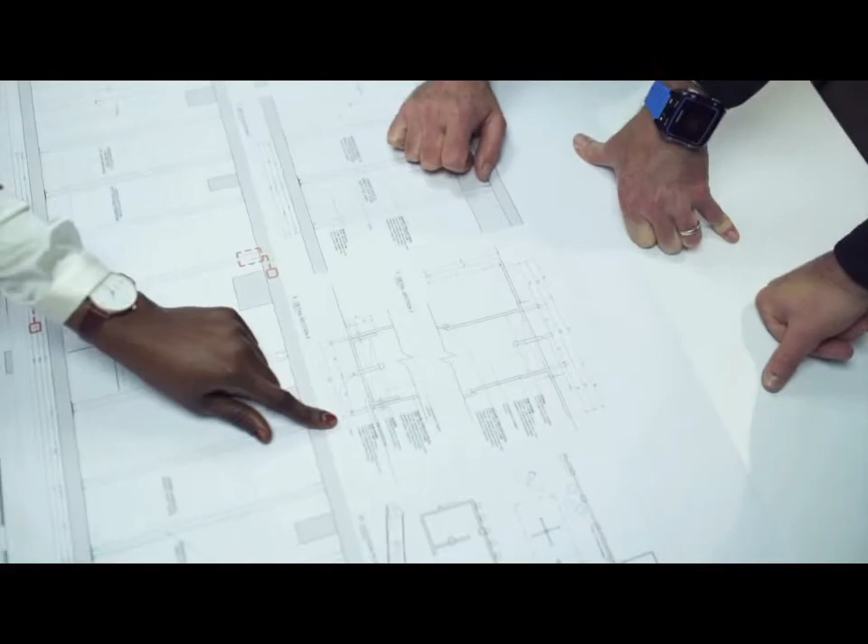We are bringing an exciting product to the sunny shores of Cape Town, South Africa. JANSEN Steel Building Systems, ranked #1 in the world and manufactured in Switzerland, will now be available on your strip. We'd like to welcome you to our world-class showroom in Woodstock for a coffee and a chat. You're welcome to bring your drawings of windows, doors, skylights, facades, or architectural elements, and we'll work with you to create a sustainable and yet elegant solution. The systems cover all elements like glazed fire, security and bullet-resistant doors, slim steel profiles for top-hung windows, and gorgeous heritage fenestration that is thermally efficient. Swiss ironmongery to last you a lifetime, and there's a wide range of products including tilt and turn windows and facades for you to come and see. In addition, we provide CAD and BIM objects, and we'll be training, accrediting and supporting local metalworkers in design, estimating and fabrication. Our local French-speaking investors, Olivia and Jeff, took good advice from experienced friends who are distributors or metalworkers for JANSEN in Europe, and they invested in M2G to become the international exclusive distribution partner for JANSEN in Africa. See you there.

That was a quick introduction to the business M2G, situated here in Cape Town, that we will be rolling out nationally, and already we have metalworkers who have joined us from Joburg and are nearly complete with the accreditation program. So let's have a look at what this program means.

First of all, we get an idea of what you do and what your interests are, and get an idea of what training you require. We then agree what those training goals will be, looking at what we want to get out of the training to make sure it remains focused. And then we deliver the training.

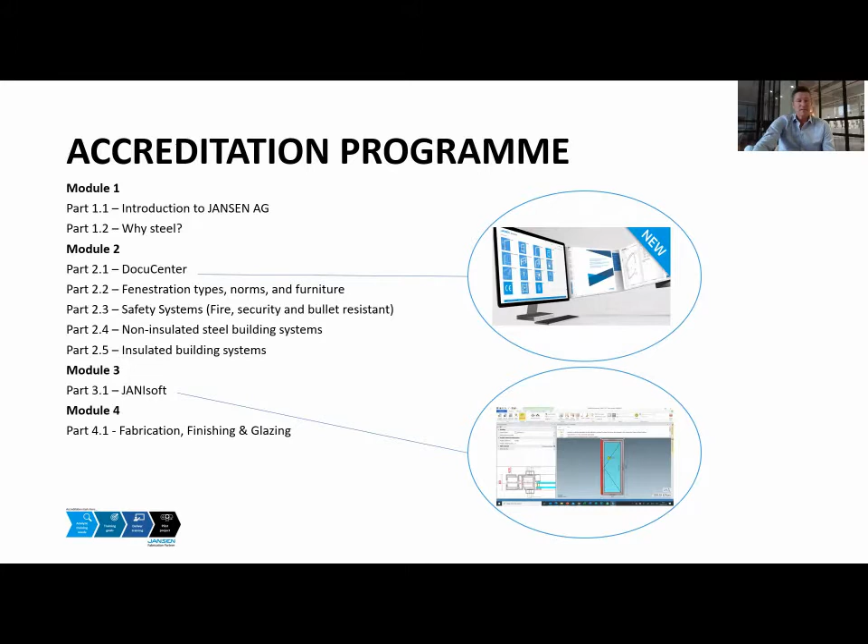And the last part is the surface protection and logistics, just looking at how do you protect steel. I think from those who are familiar with the corrosivity maps in South Africa, apparently corrosion worldwide is worth $2.5 trillion annually.

So how do you protect it in the coastal regions? The ISO standards have created a standard for the various coastal regions to the drier inland regions, and they're just taking the right view on protection to ensure that the JANSEN brand is upheld.

Okay, and then module 5 is the last part of the program, and that is the trial project for accreditation. And that might be you'll make a door for us or a window that we can ensure that what you are delivering to the client is good quality.

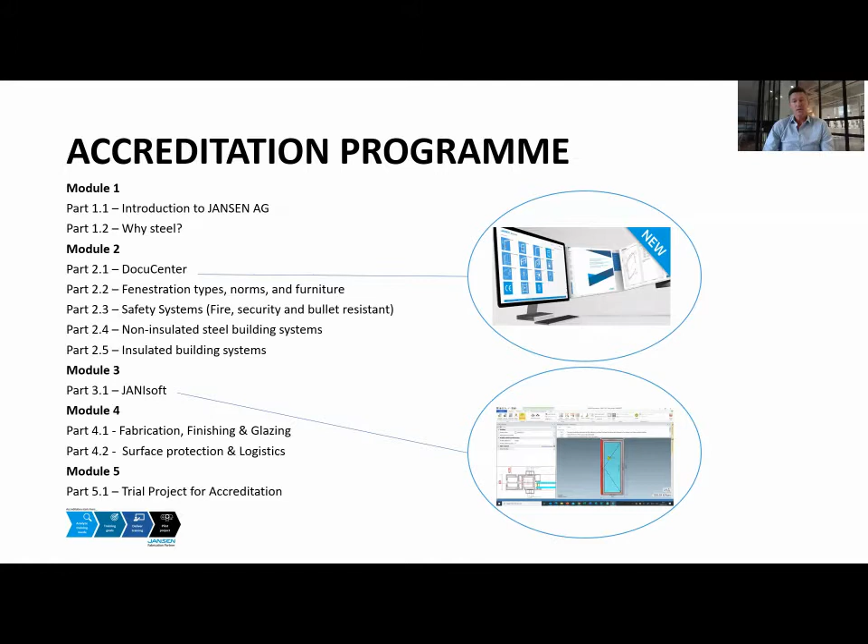So as metalworkers, the reason we have this accreditation program so that you can buy our profiles is to ensure that you become good ambassadors for JANSEN. And our values are quite simple: professionalism, excellence and trust. And that's how we intend to win a niche market upon which you can build your business locally.

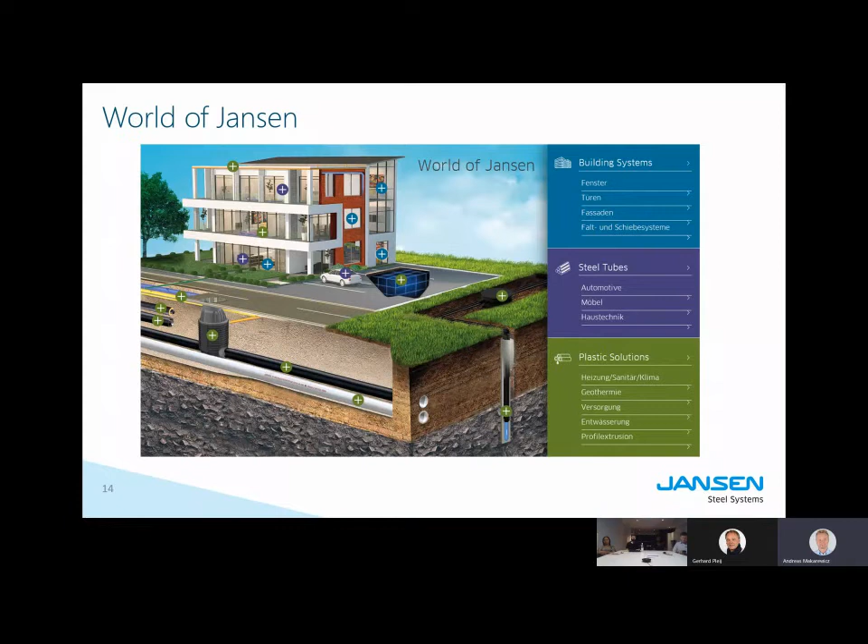A few detailed examples. Steel tubes, as I said, car elements, mainly responsible for the stability and safety of the car, and also transmission of power. So you already can notice, these are really high quality elements, high quality steel tubes. This is what we make. This is also what allows us to exist here in Switzerland.

These days, 95% of all steel tubes are manufactured in Asia, China and India. And to be able to produce steel pipes in Switzerland, we have to offer a little more than just average quality. We offer the state-of-the-art, high-tech pipes.

Furniture, all the tubes you see here covered with chrome or chromated steel tubes, this is what we deliver. We don't deliver them already finished. We deliver the raw material, and the furniture companies finish them and assemble the furniture.

Tables like these with adjustable height, the columns for the tables, this is also Jansen, all this furniture based on tubes. This is it. Here you see a chair, office chair, this is it. Also sanitary business, we're big here.

Piping systems and radiator elements, this is steel tubes. Here a little more detailed view of a car. You see here the steering elements, drive shafts, prop shafts, airbag tubes, piston rods, amplifiers, and so on. This is all based on Jansen products.

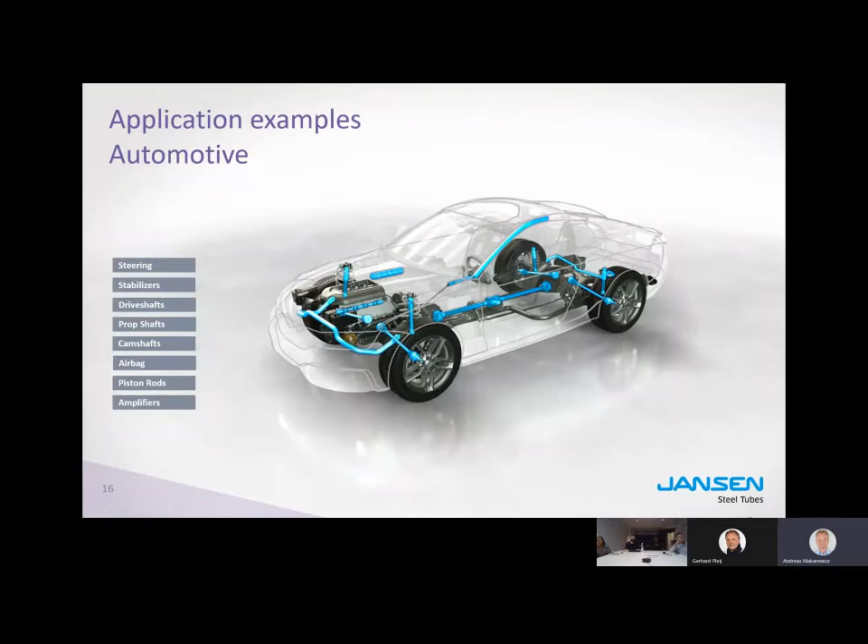Plastic Solutions, the smallest business division, was founded in 1955, when the modern plastics hit the market, PVC and later polyethylene, PE. We started experimenting with that in the 50s and then established a full product line, mainly pipes for water and gas supply, heating, air conditioning, and plumbing.

Geothermal systems is a subdivision of Plastic Solutions. Here, not only the tubes are produced, but also the sensors, the sondas, and everything you need for the geothermal heating system or energy recovery.

Do they have systems that compete with Geberit's typical plumbing systems? A good question. In fact, we produce some of the tubes that Geberit sells. So we have our own brands, but they are not very strong and not very recognizable in the market. We also produce or provide the tubes for other market leaders like Geberit.

The Mepla system, very popular in South Africa, is produced partially here in Oberriet. So the multi-layer systems, we have PE, aluminum, and another PE layer. I'll show you an example of that.

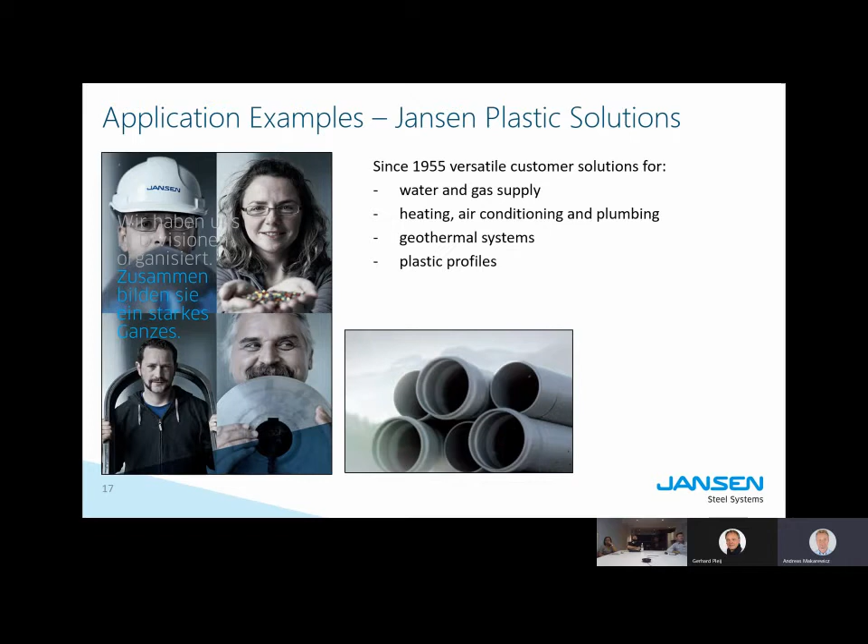Also, several plastic profiles are extruded here in Oberriet. We use these profiles in our building systems division as thresholds and as different elements for windows and doors. Here are a couple of examples.

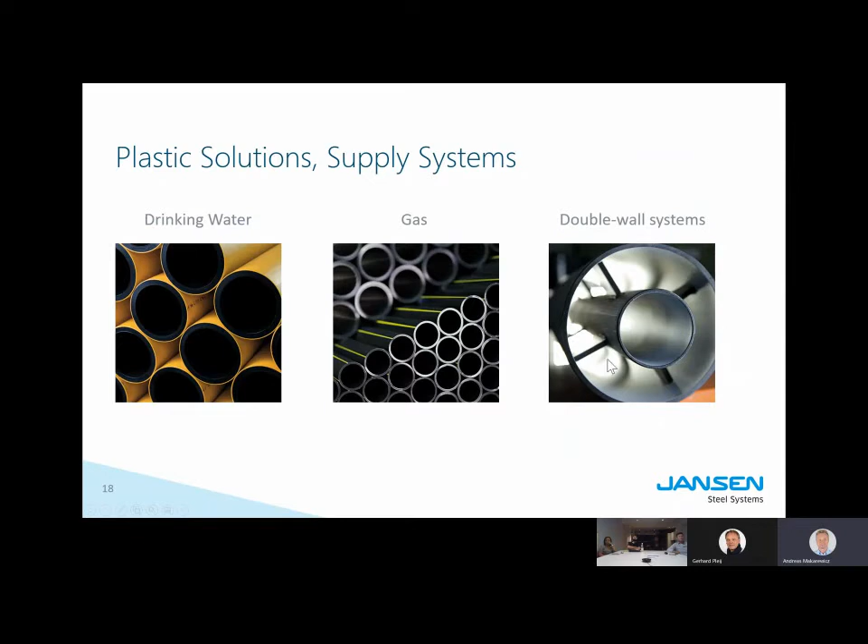Supply systems, drinking water, gas. Jansen is also strong in the insulated piping systems, the double wall systems. Here you see an example, thermal water in a tunnel. This is a typical application here.

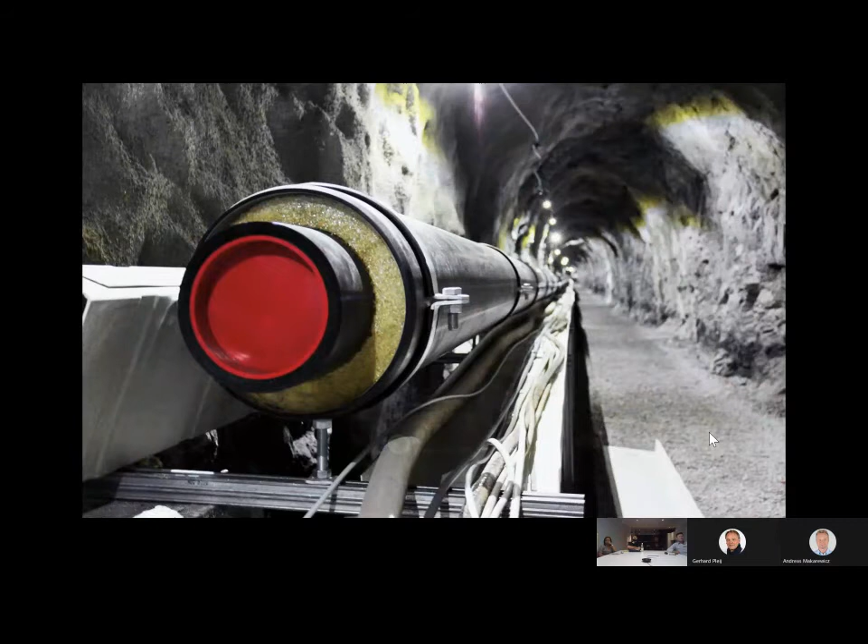Incredible. Drainage systems as well, sewer pipes, seep pipes. The Q-bic Plus is a rainwater management system. It's a modular system where you connect several of these cubes to a rainwater management system. We have won several awards when it comes to design and usability of these systems.

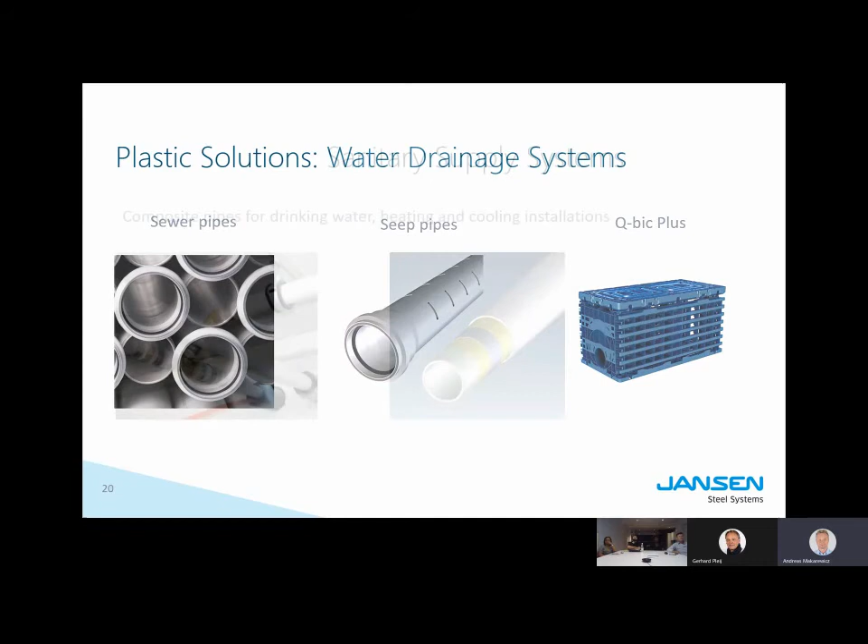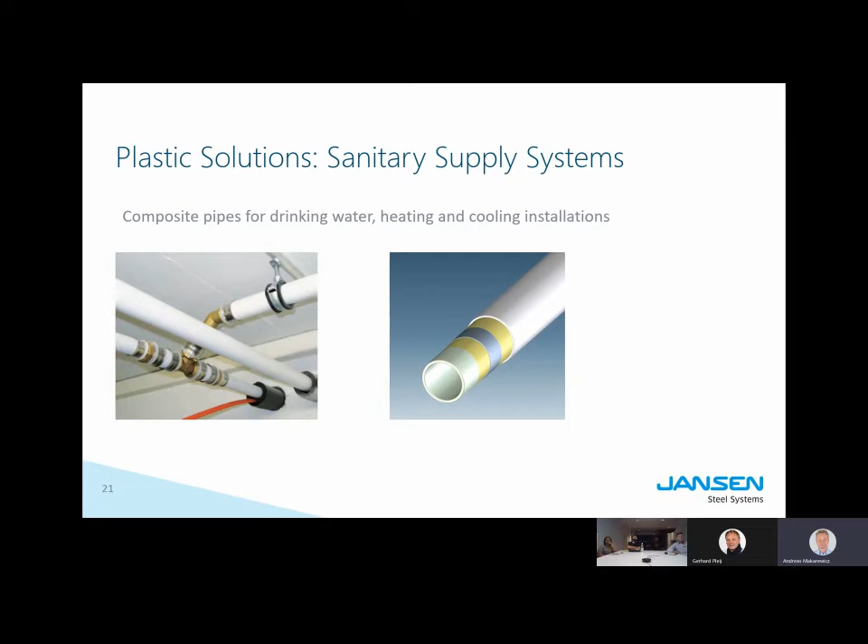Here you see the multi-layer system for either heating or water supply, drinking water supply. And this is, I guess, Viega. Viega is the final supplier of these systems, and we produce the raw material, the pipes. They equip the systems with fittings and then sell the full solution. Geberit does exactly the same.

Geothermal systems, as you see, the pipes and also the elements, the sensors, everything you need. One of the fastest growing subdivisions here at JANSEN. Huge potential.

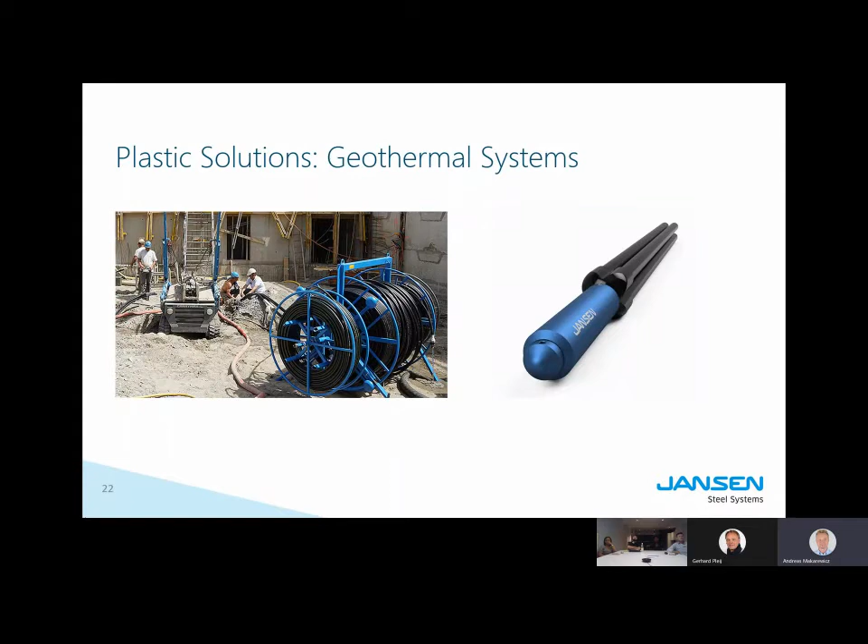But what concerns us, what we will concentrate on, is the building systems. This is where we are active.

To begin with, I would like to show you one of the nicest buildings here on the JANSEN site. This is our campus building where the steel pipes are headquartered, where the division or our company heads also have their offices.

And this is also for the architects. It's a very prestigious building designed by Davide Macullo, a star architect from Switzerland, a student of Mario Botta, one of the world's best-known architects, I guess. Davide Macullo is, by the way, also a friend of the JANSEN family, and he delivers a lot of good inputs when it comes to how to approach architects, who are one of our main target groups as well.

What helps us develop the building systems is the new technology center, which you see here on the right-hand side. It has been established some 3 or 4 years ago. It has been built on a site where an old building was standing. It was demolished, and a new building was built. It's equipped with a nice VISS facade on 2 sides.

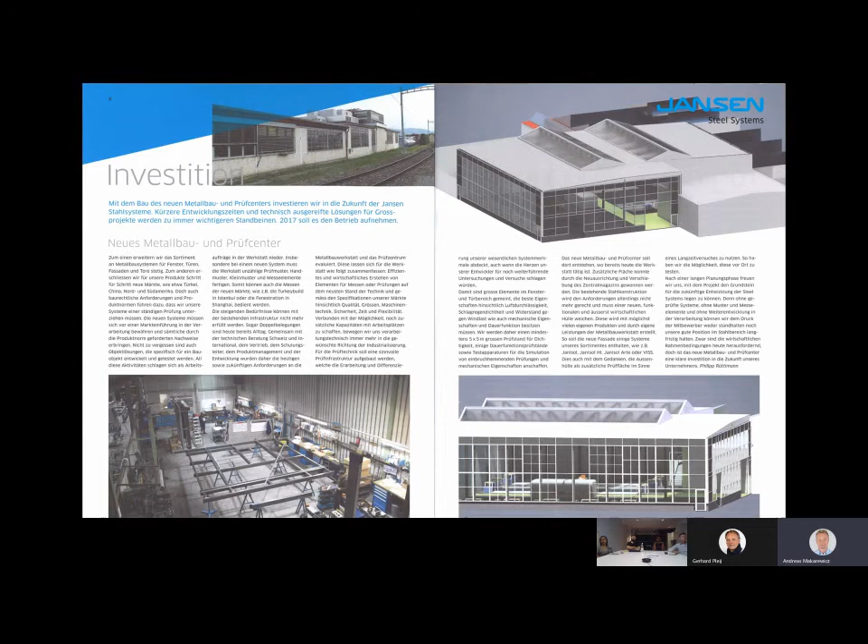That means we can also prepare the tests. We can do the preliminary tests, and once we're ready, we invite the officials and run the sharp tests here on site. Saves a lot of time and a lot of money in the end. And of course, the chance of succeeding, of passing a test, has become much greater since we have this building here on the site.

Different target groups, differentiated challenges. As Gary mentioned, we are active in high-end residential and in public project business. The big turnover comes from the projects, but high-end residential is where we get a better margin and can employ our imagination much better. Especially the developing countries offer us opportunities to cross borders and try out all the possibilities our systems offer.

A couple of examples here. This is a concert hall in Kilden, Norway. You see a fraction of the facade. I'll show more pictures of this project later. The particular characteristic of this facade was the height - it's some 21 meters high, as far as I remember, or 16. I have the exact data later.

It's one of the highest facades we've ever built, with the highest static requirements, due to the fact that this concert hall is located next to the sea in Norway, and the wind load is extreme - there was a requirement of 150 kilograms per square meter. Combined with the size of the facade, we had quite a challenge. We mastered it - the facade is 130 meters long and, as I said, 20 or 16 meters high. I'll give you the correct data later. So, one of the biggest facades, one of the most impressive ones.

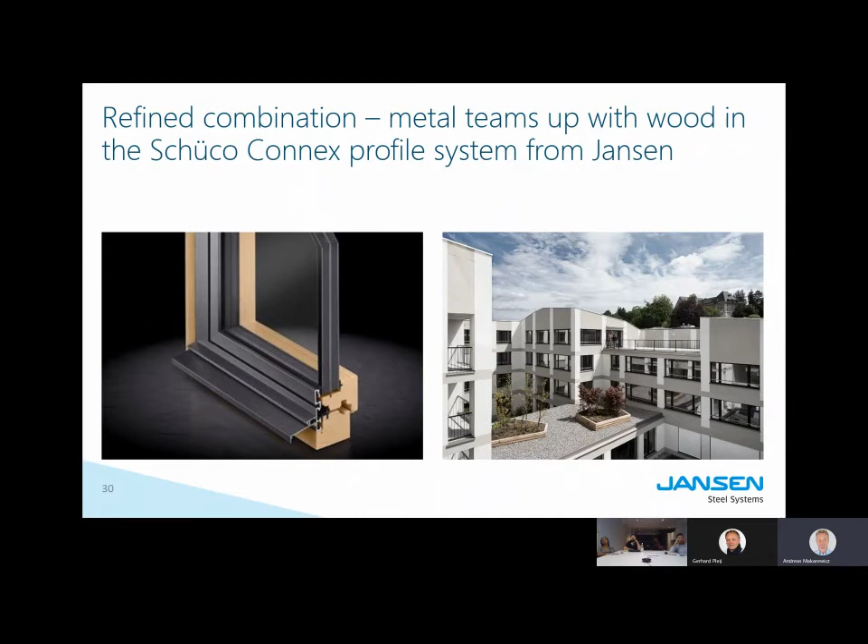We passionately keep creating something special, and this will not change in the future. Our technology center gives us the possibilities, and I'll show you a short movie here - an image movie of the building systems, just recently produced. There is audio in the background; it basically expresses the idea that there are no limitations with steel. Steel is, let's say, the raw material from which the architect's dreams come true or are made of. And here you see some examples of JANSEN projects.

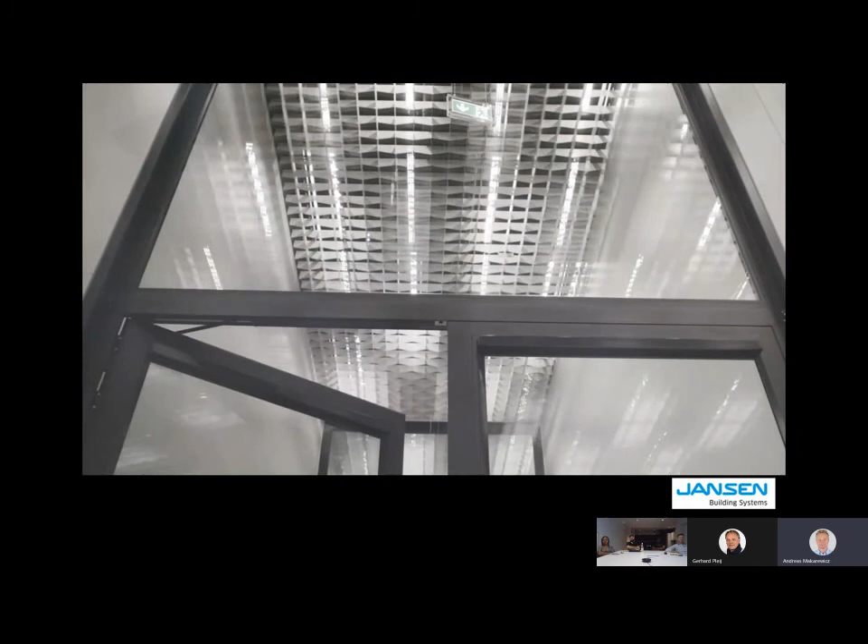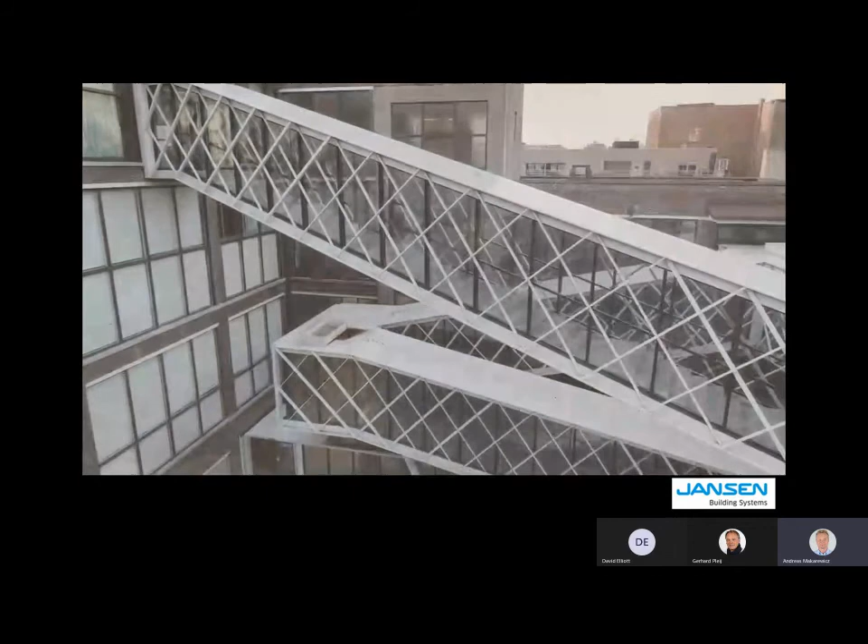History, elegance, and natural, durable, secure, slender, and sophisticated. This is why we offer solutions for windows, doors, and facades made of steel, corten, or stainless steel. For outside, for inside, for renovation, for new builds. And it looks like this, or this, or this. And while you take care of your customers, we'll take care of all the rest. Complex structural calculations, U-value calculation, technical testing, and fire protection. Construction of life-size samples and fabrication training for metal fabricators. One material gives you infinite possibilities.

Good, I'm glad it worked. The next movie is the one I want to show you with the sound. It's about our production facilities and the production methods we employ here. So far, so good. Do you guys have any questions concerning the material I've shown you so far? No, all the content looks good.

I was smiling listening to that voiceover of the video. Initially I thought it was Swiss German, then it sounded like a British guy, and I can't decide what nationality that voiceover was. It's mainly GB, it'll be British English because that's the speakers we have available here. So that's where it comes from. Yeah, we once had somebody from Georgia, but it didn't work. Hi, how y'all doing?

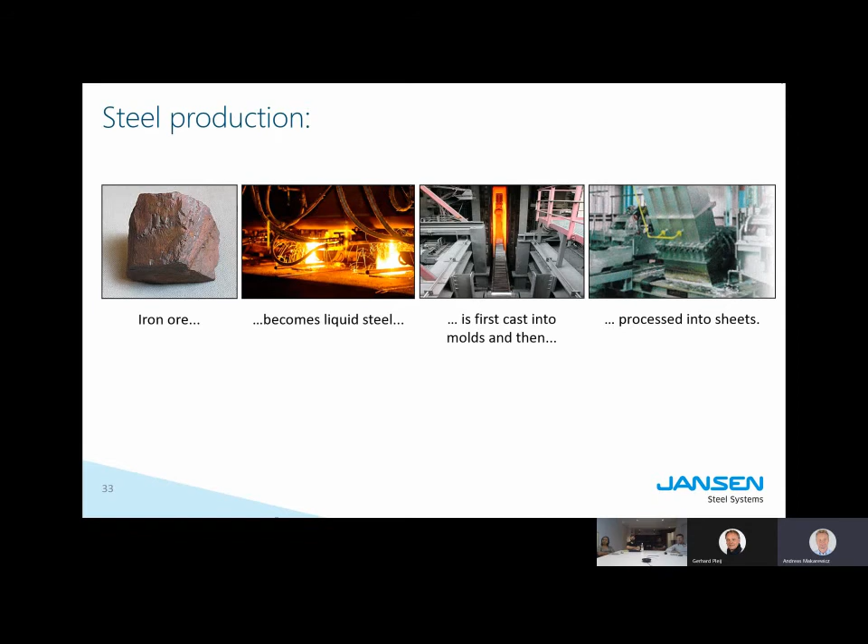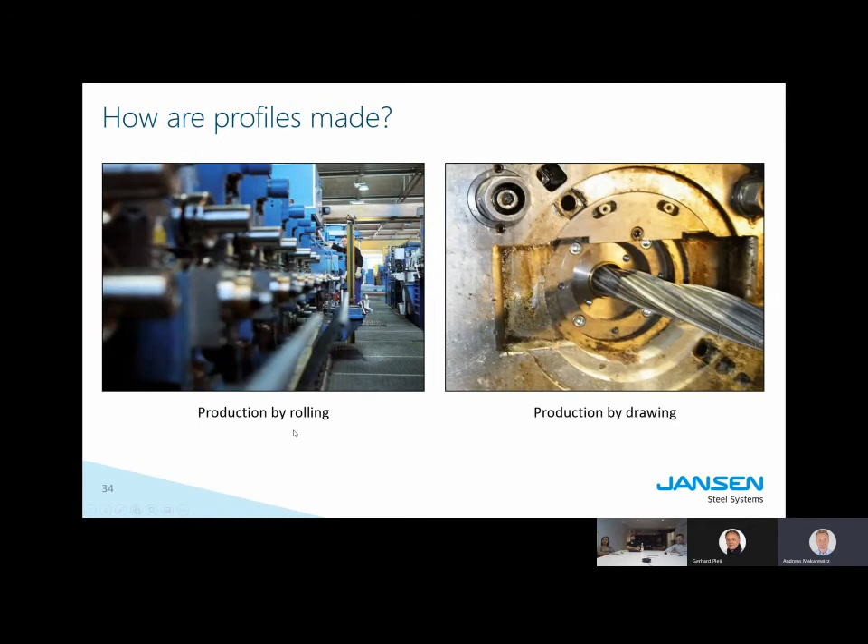I'll run it and we'll talk about it later, since this replaces the factory tour. Since you guys are far away from me, I can take you to the production site this way. Rolling and drawing are the two methods we use. Rolling is transforming a flat piece of steel, or a continuous flat piece of steel, into a tube, a round pipe, welding it, and then either transforming it into other shapes or cutting it into pieces.

So this is rolling, cold rolling, and drawing is done by pulling an already welded tube, produced in the rolling process, through a matrix or die - an inner die and outer die - and the gap between the two dies defines the shape of the structure you want to achieve. With the drawing method you can produce irregular shapes, twisted pipes, twisted shapes, different wall strengths of pipe or profile walls, and complex profiles altogether.

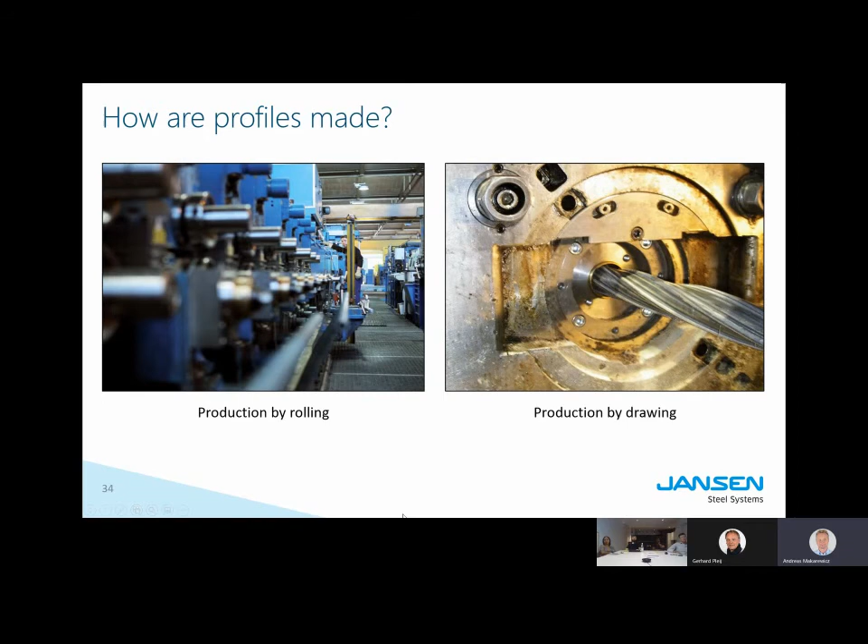So let's watch the movie, which will explain how these two methods are employed here at JANSEN.

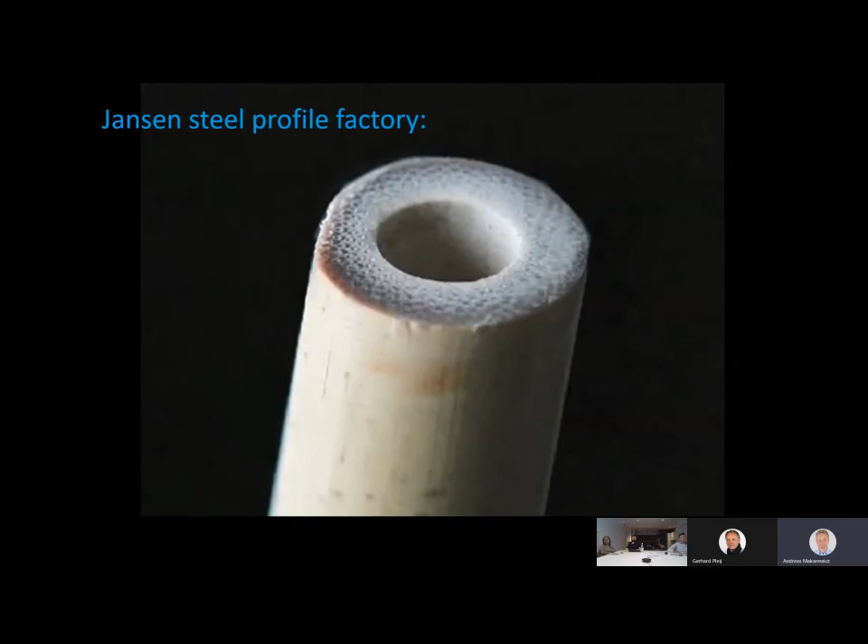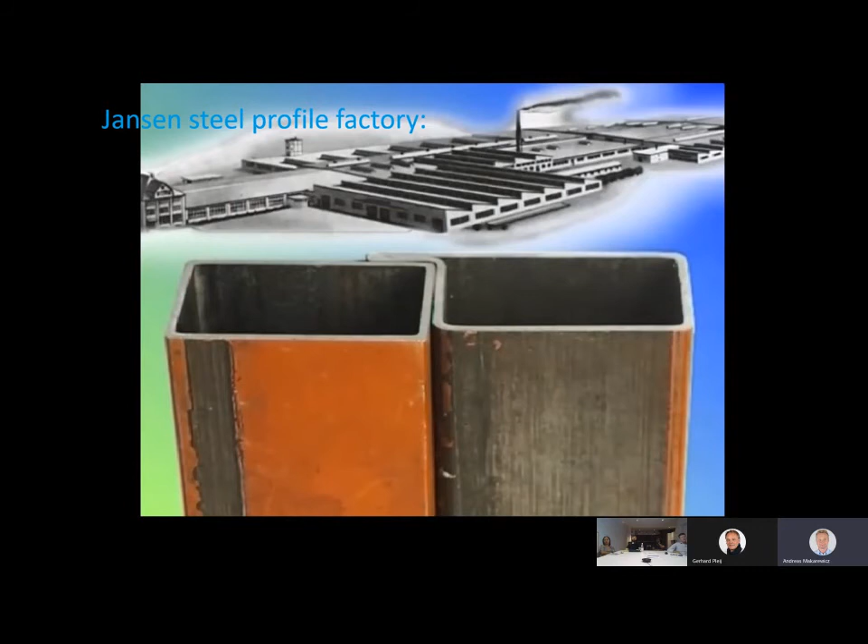There was no need for man to invent the tube. Nature had been using it to great advantage long before, in her aesthetically and functionally balanced art of construction. Back in 1930, JANSEN produced for the first time cold-drawn, profiled steel tubes of asymmetric cross-section, known as flanged profile sections, for door and window construction. Induction and high-frequency welding were introduced into steel tube manufacture from 1954 onwards.

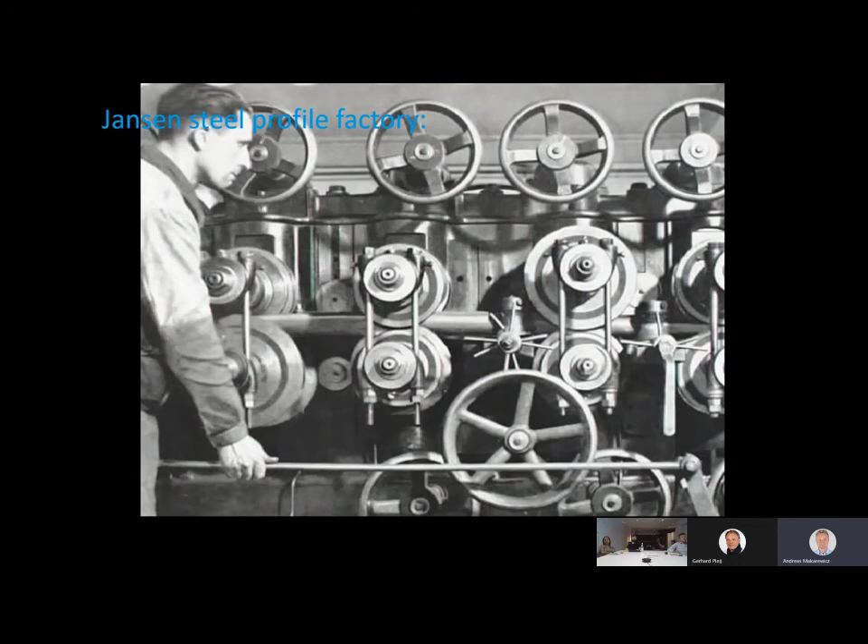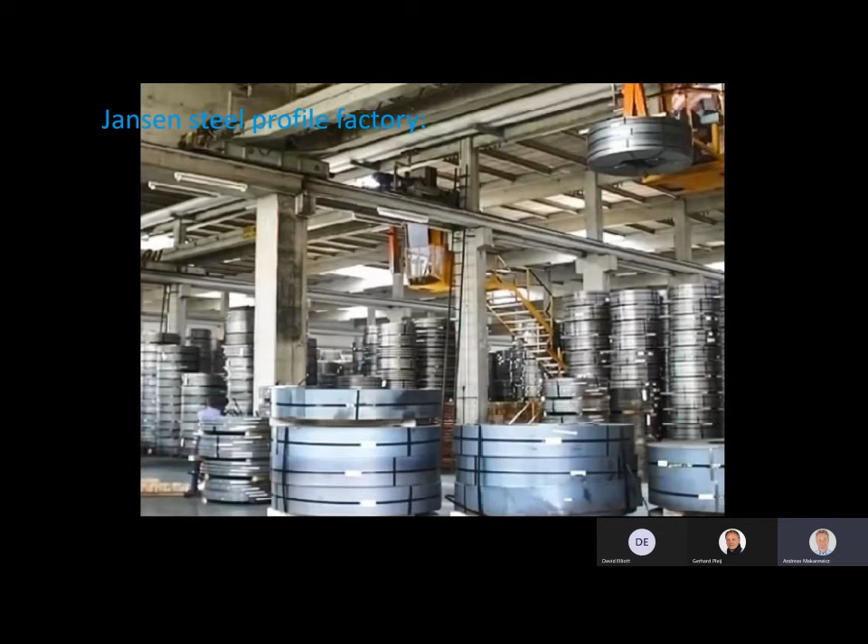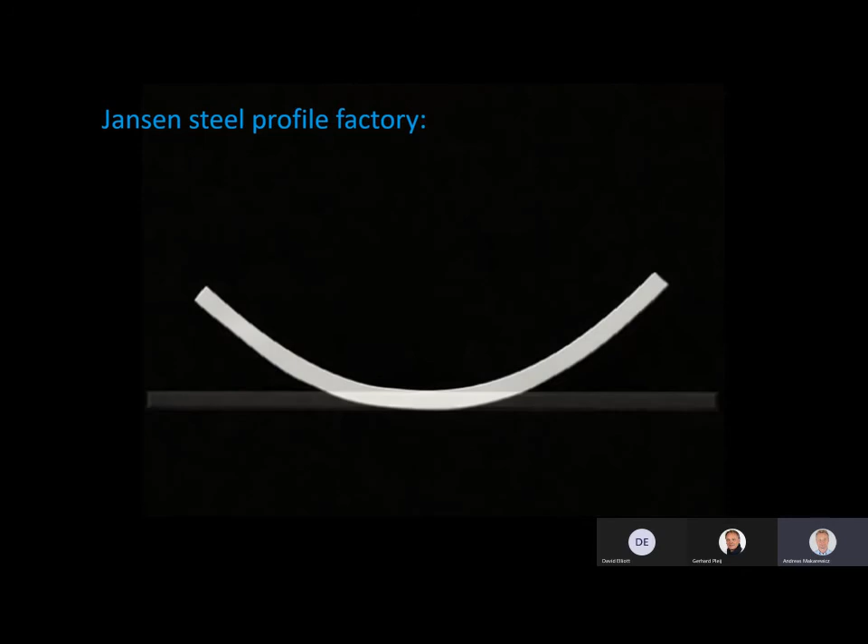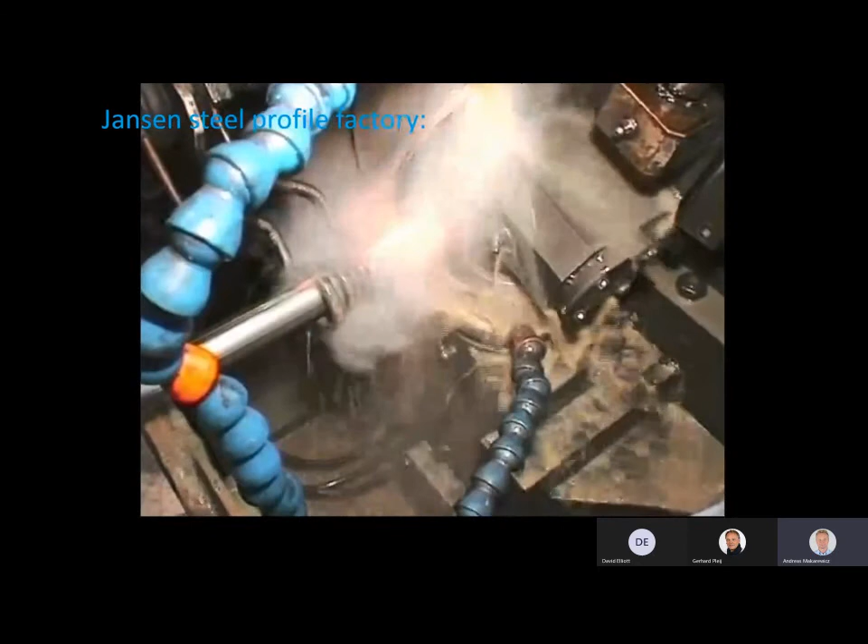The raw material is hot or cold-rolled steel strip, made from plain or low-alloy carbon steels. In a first operation, hot strip is pickled in acid to remove any mill scale. This is how the longitudinal seam tubes are made. By passing through the profile rolls of the welding machine, strip steel is gradually formed into a tube or profile featuring a longitudinal slot. In a very short time and without contact, a high-frequency system inductively heats the strip edges to welding temperature. Edging rolls now bring the edges together, and pressure welding takes place.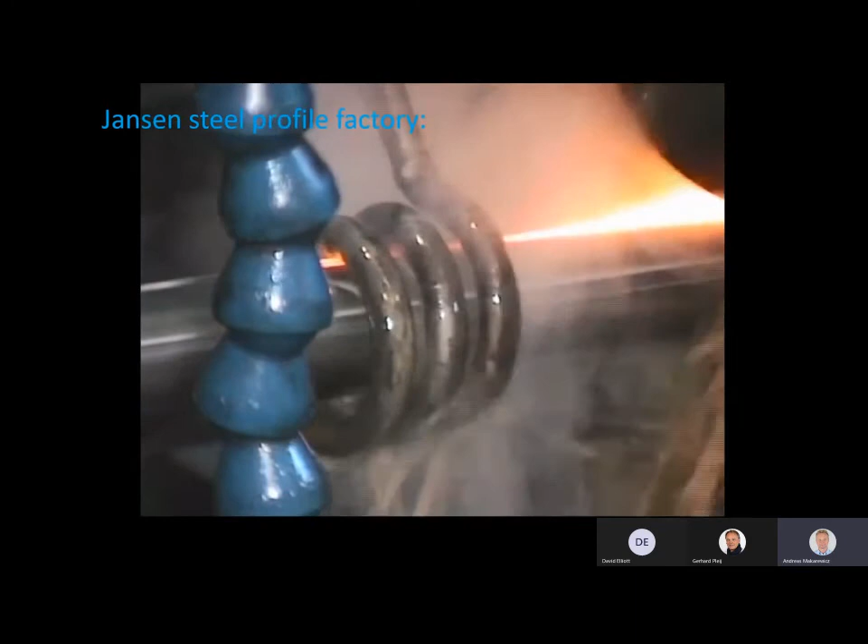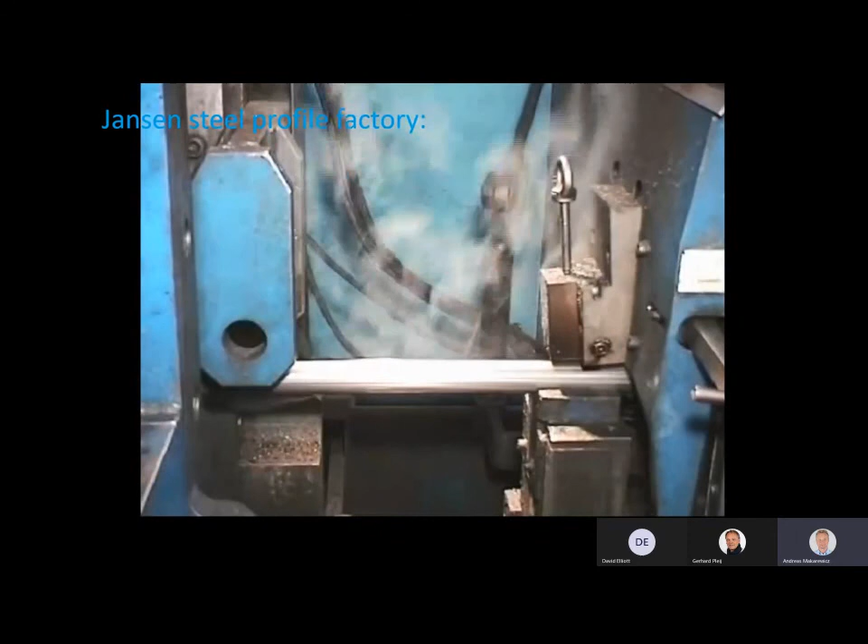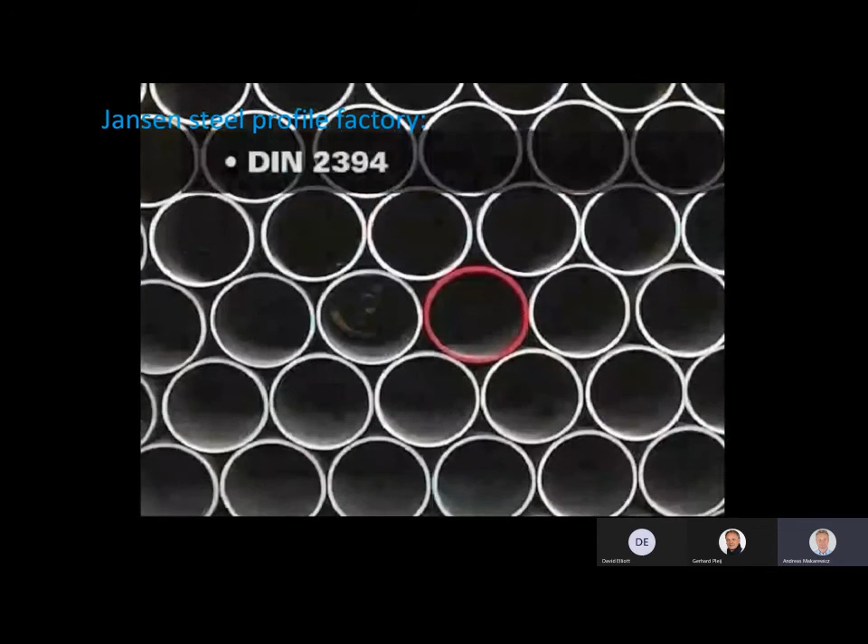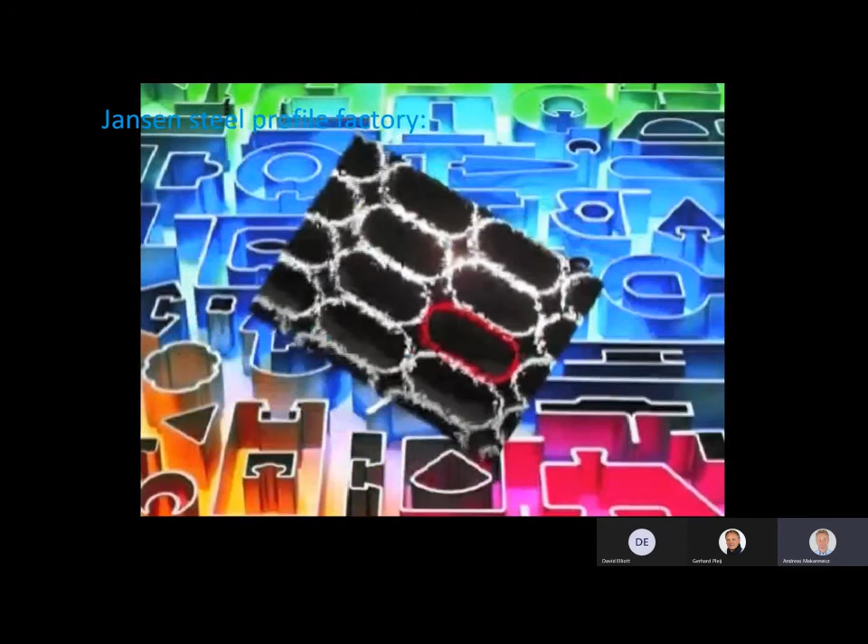No extra material of any sort is used in pressure welding, which means the weld is of the same chemical composition as the basic material. The welding burr from edging is removed. A following saw cuts the endless tube into sections of the desired length. The precision steel tubes, rolled to size, leave the welding machine in their final cross-section - namely round, square or rectangular, flat oval, oval, half round, or in a special profile, but also other shapes to suit the customer's requirements.

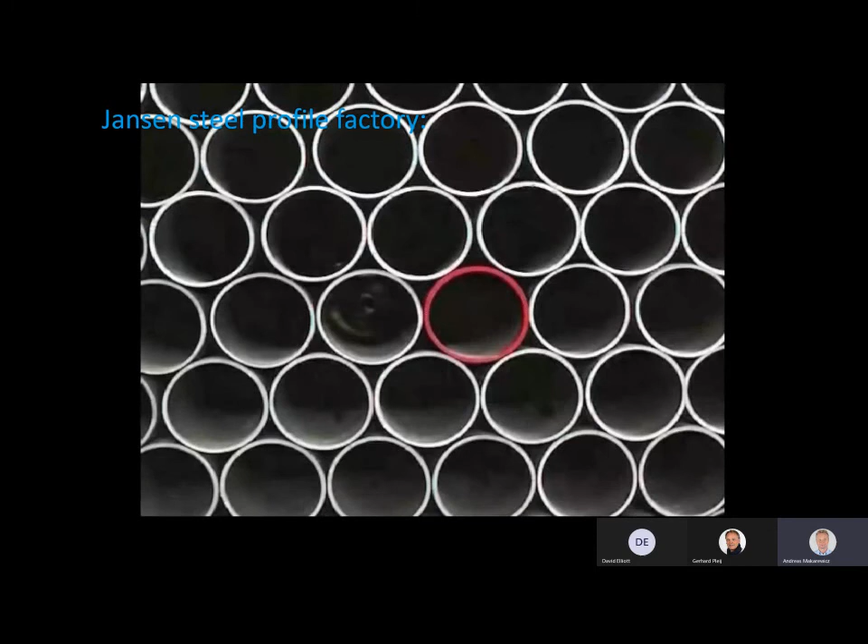After welding, many JANSEN tubes are processed into drawn precision tubes of steel, or into sectional steel tubes. How are steel tubes drawn?

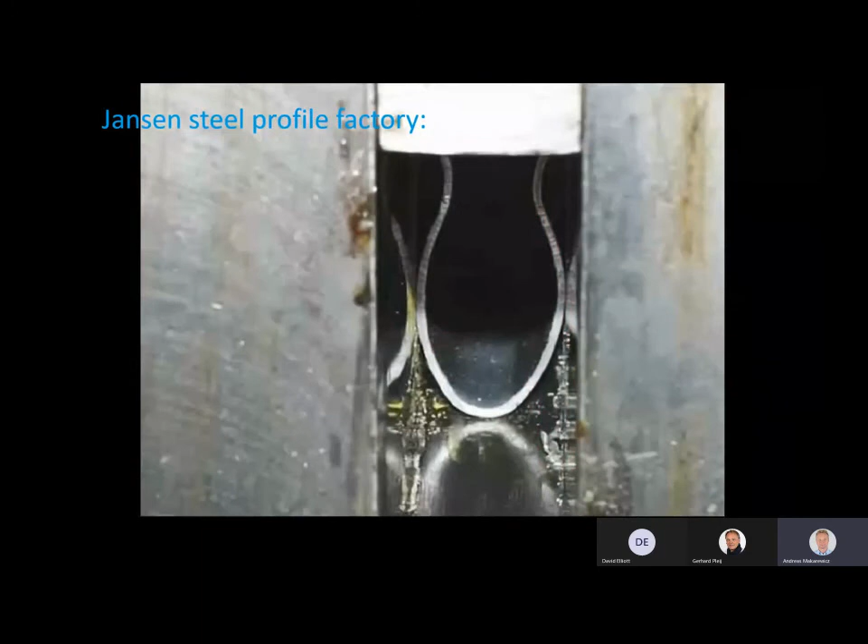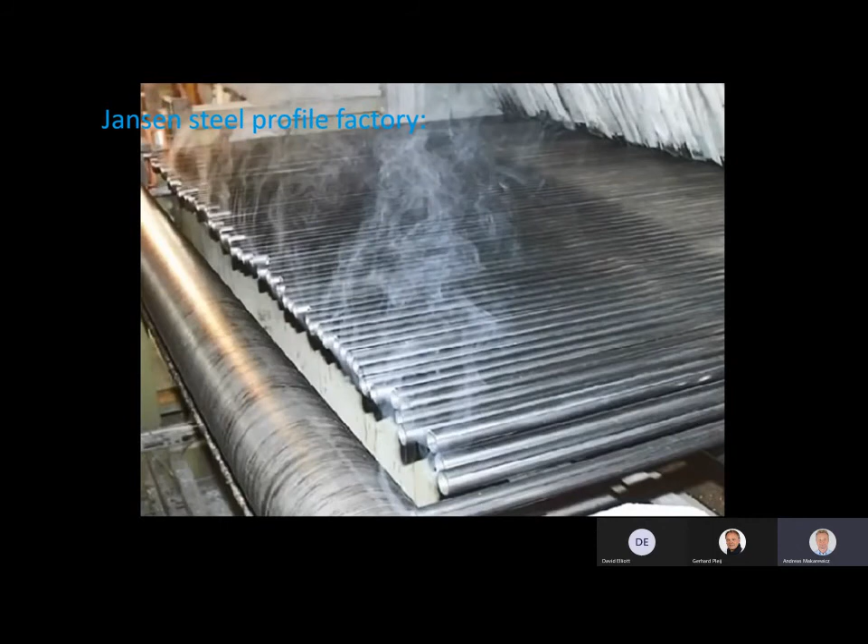The drawing tag, a piece of reduced diameter, is formed to one end of the semi-finished tube. Annealing takes place at about 920 degrees Celsius in the continuous furnace to normalize the material's structure. In the pickling plant, the surface is chemically treated and prepared for the drawing process.

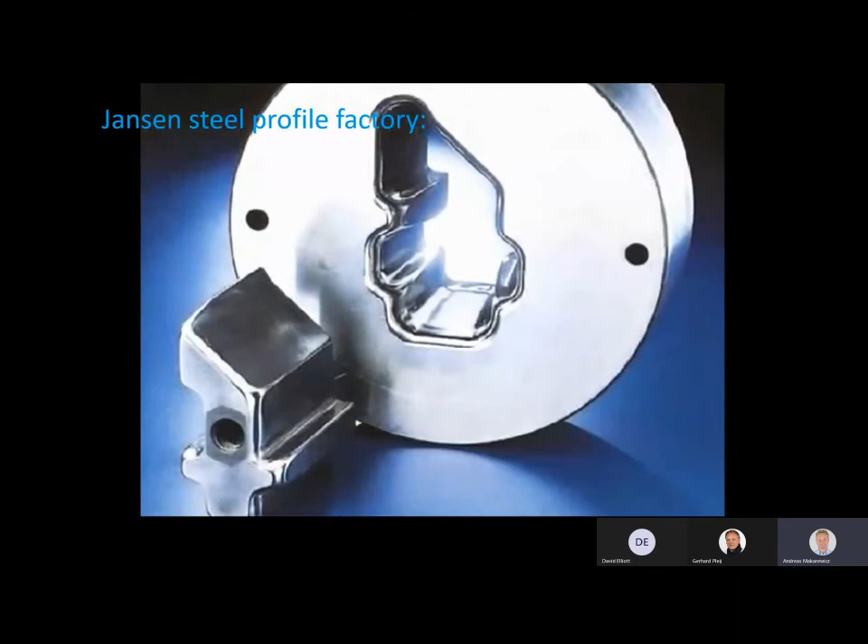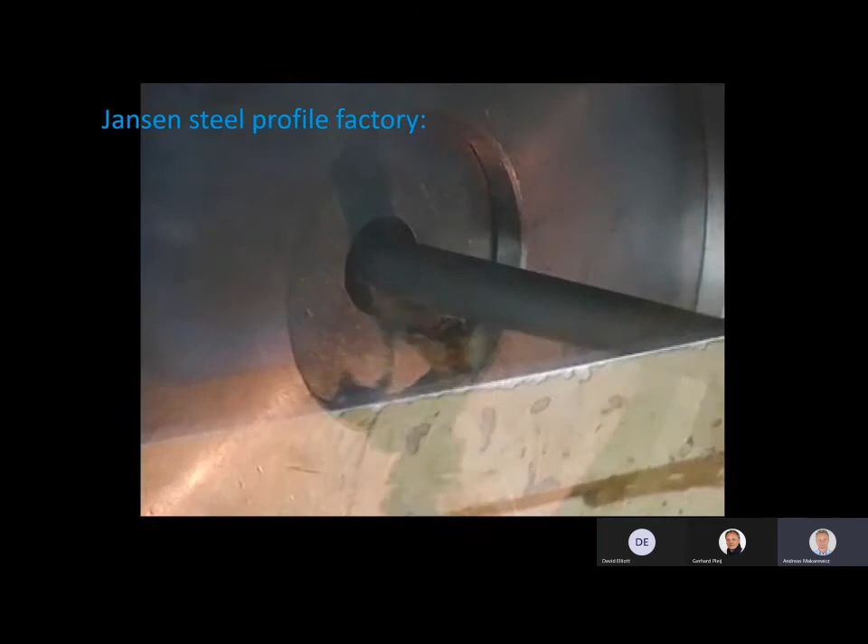On the draw bench, the semi-finished tube is pulled through the ring gap between the precision ground outer die and the mandrel or inner die to reduce the diameter and the wall thickness of the tube. More complex shapes require several pulls and repeated annealing. In other words, annealing, pickling, drawing, annealing, pickling, drawing, and so on.

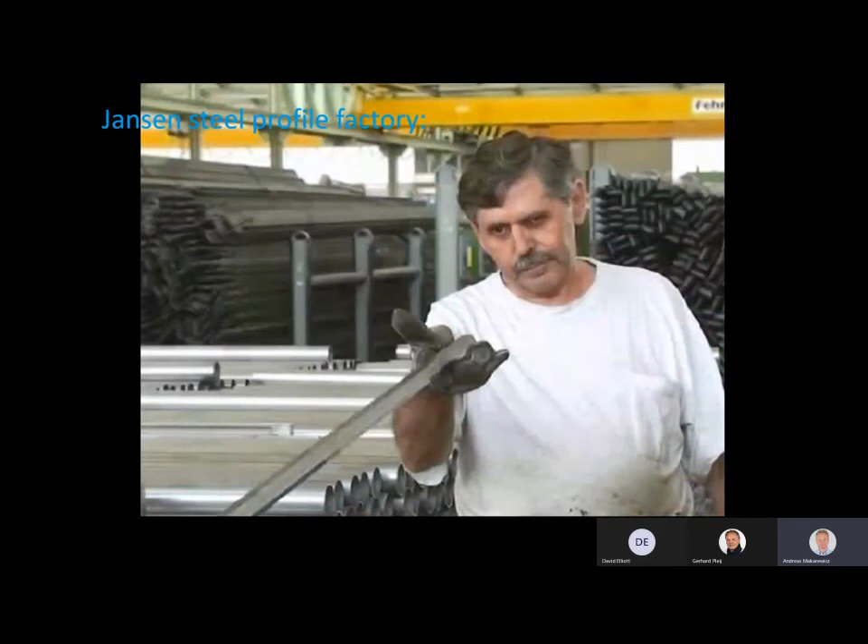After drawing, the tubes are straightened. The end of the tube and the drawing tag are sawn off.

Okay, so that's the main steps in our production. How did it come across? Did you guys, could you follow everything?

I want to ask, just because I'm curious - I'm familiar with extruding, like basically just pushing putty through a syringe and then a shape comes out. So how come that manufacturing process isn't employed for your steel to make that complex shape, whereas you do this process called drawing? Good question.

Well, the reason is the melting temperature of aluminum versus steel. You can extrude aluminum just like it was plastic. 660 degrees is the melting temperature, so you can use steel dies to extrude aluminum, no problem. But it won't work with steel - steel has a melting temperature of 1,560.

And well, the steels we use, it would be very difficult and energy consuming to produce an extrusion system for that. As far as I know, they don't exist, or exist in very limited availability - not for profiles, not for tubes. So that's the reason, it's really just about the melting temperature. That's the main factor. You can't extrude steel easily - it won't work because of the problem with the energy and the dies.

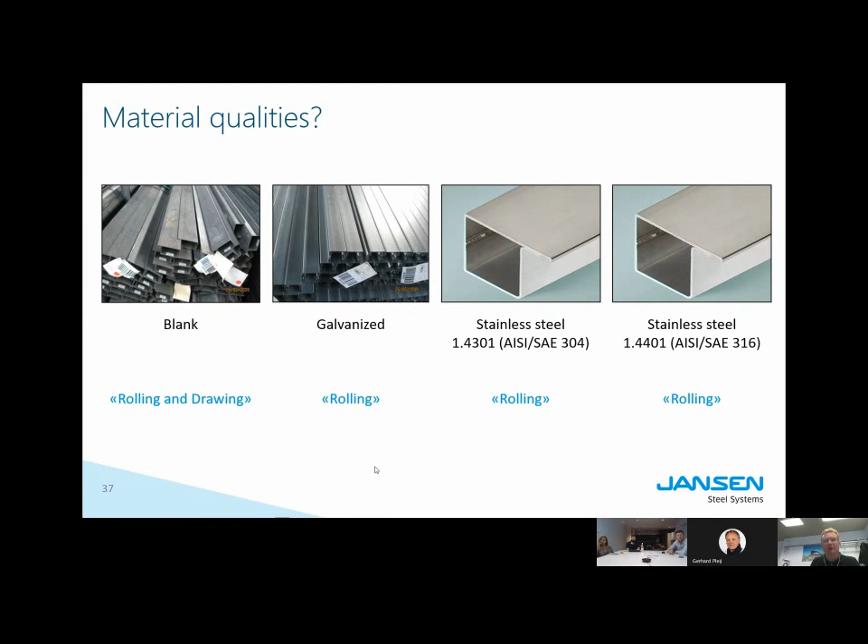So, so much about the production methods and our company. Do you guys have any questions so far? We had an interactive session here already. Any other questions?